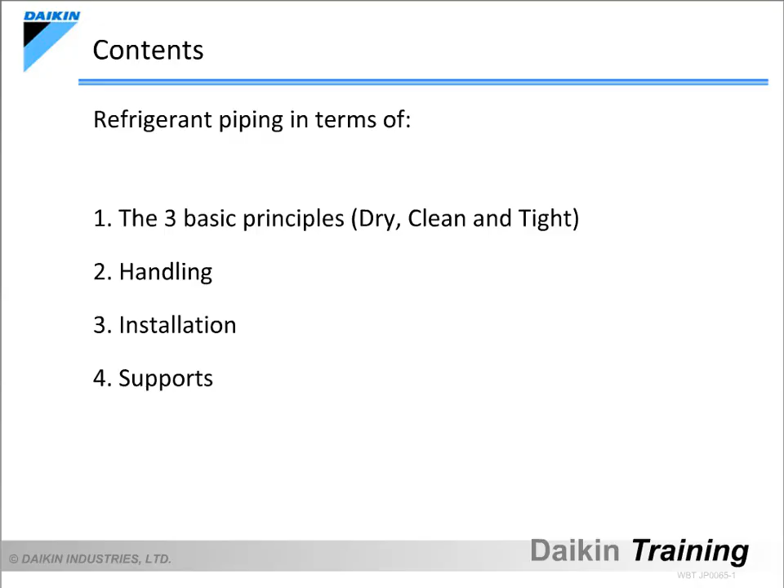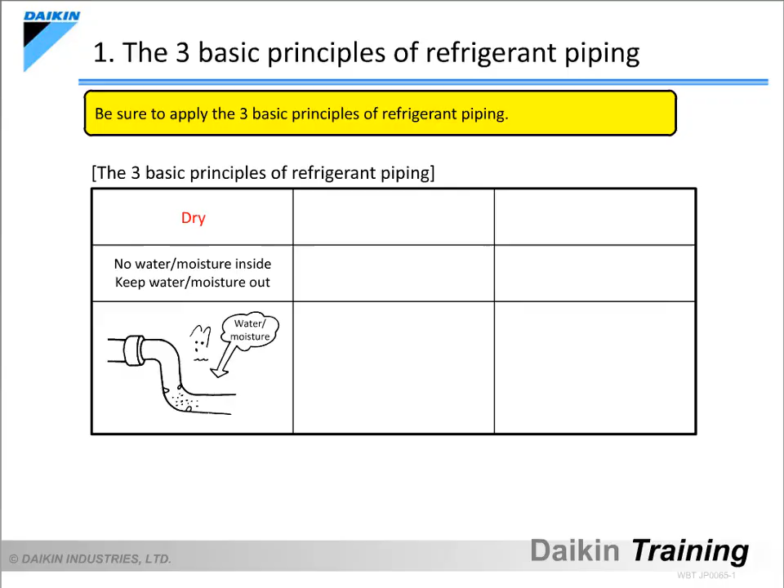When installing refrigerant piping, be sure to always apply the following 3 principles. The first is dry: water and moisture must be kept out. The second is clean: dust and contaminants must be kept out. The third is tight.

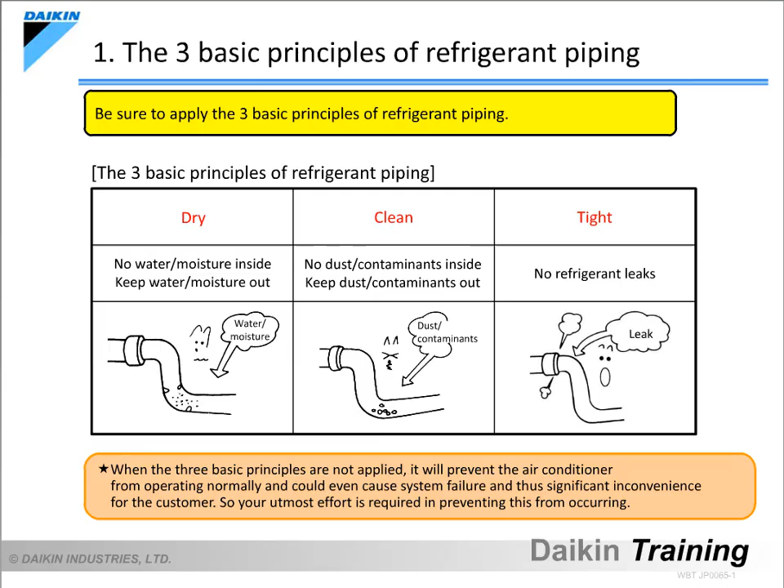Refrigerant must not leak. When the 3 basic principles are not applied, it will prevent the air conditioner from operating normally and could even cause system failure, causing significant inconvenience for the customer. So your utmost effort is required in preventing this from occurring.

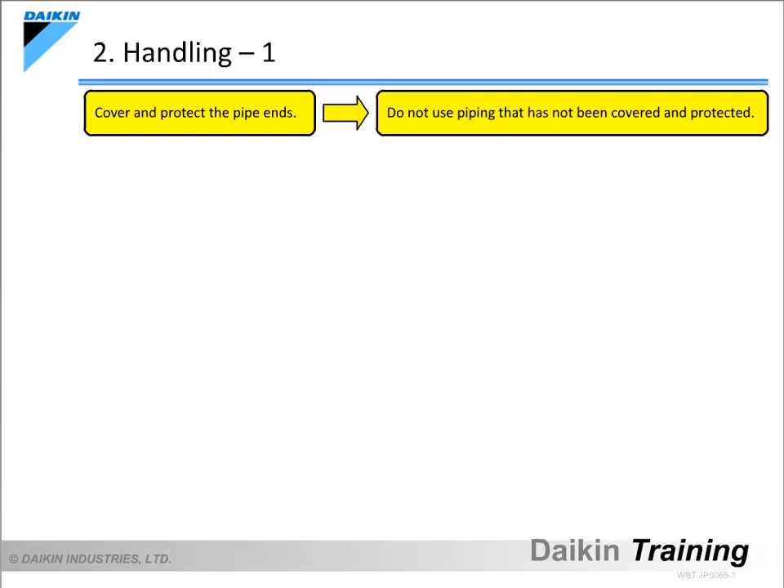In order to properly install piping, appropriate handling of the refrigerant piping is necessary, in addition to the installation work itself. In other words, the refrigerant piping must be handled so that no water, moisture or dust can get inside. That is why it is important to cover and protect the pipe ends when storing refrigerant piping.

Never place refrigerant piping directly on the floor. Always place it on a table or the like. If placed directly on the floor, water, moisture and dust could easily get inside the pipes. Particularly when pushing piping through a wall, be sure to securely cover and protect the pipe ends.

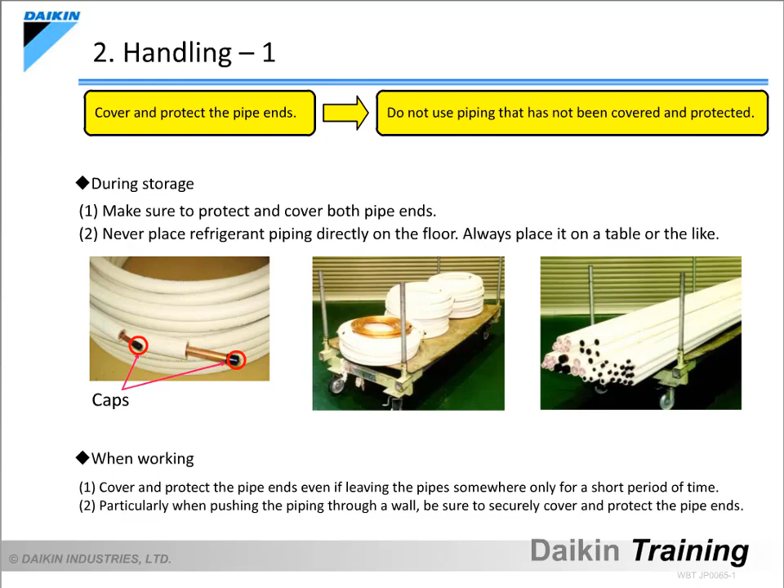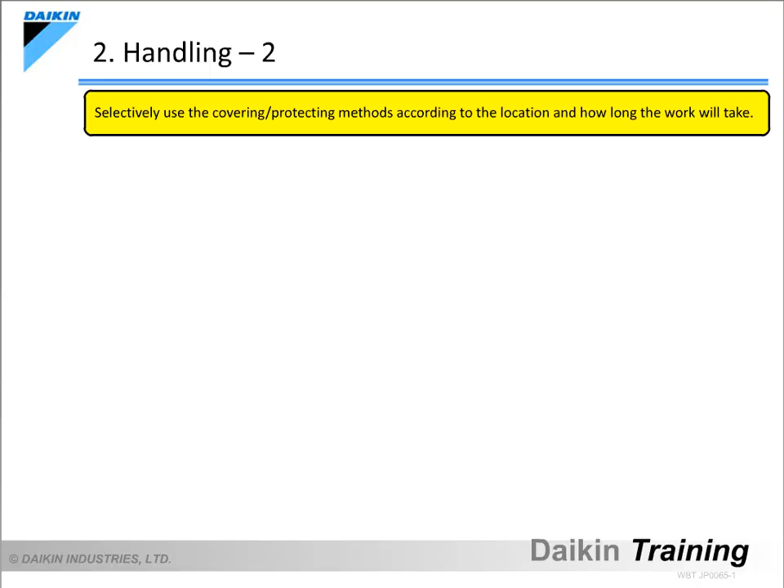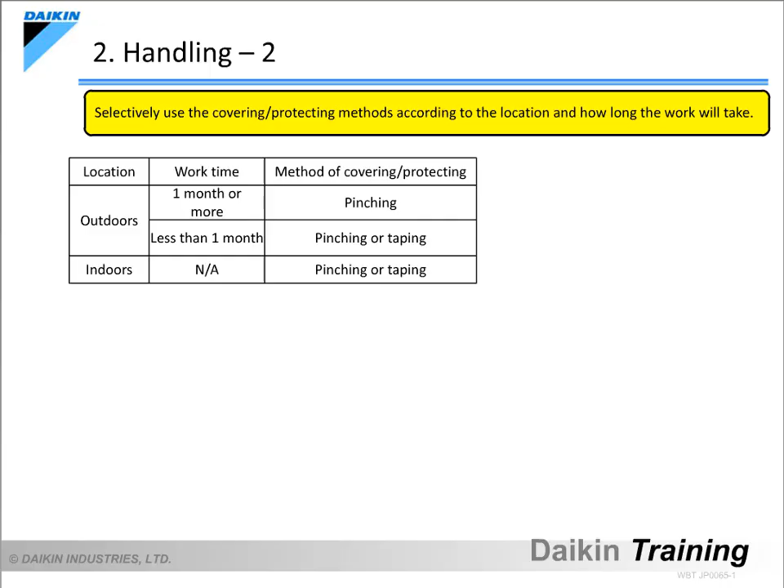The following covering and protecting methods are to be selectively used according to where the refrigerant piping will be installed and how long the work will take. When it is an outdoor location and the work will take at least 1 month to complete, use the pinching method. When the work will take less than 1 month, use either the pinching or taping method. When it is an indoor location, use either the pinching or taping method.

With pinching, the refrigerant piping is closed off, and the gap on the end is brazed. With taping, the end of the refrigerant piping is covered with vinyl tape.

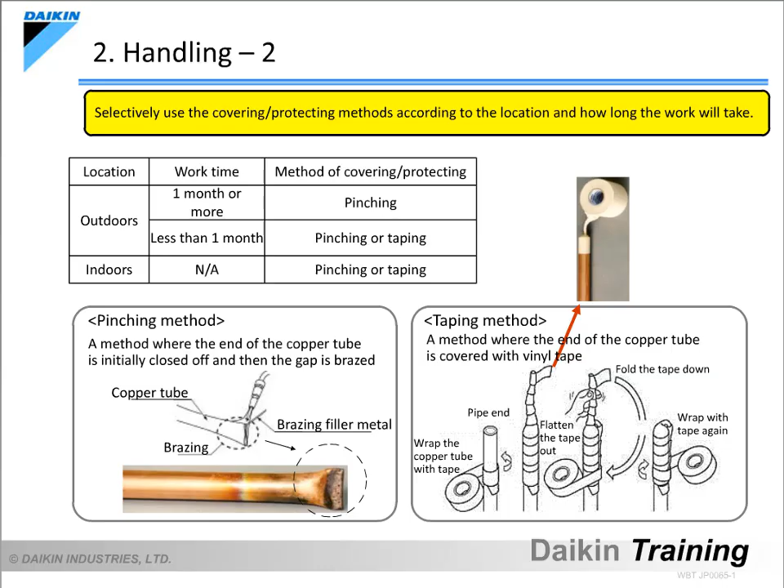The following should be adhered to when installing refrigerant branch piping. Be sure to always install the REFNET header or horizontal piping from the REFNET joint so it is level. If these are not installed level, it will cause refrigerant drift, which will result in strange noises and prevent normal operation. In terms of vertical piping from the REFNET joint, be sure to always install it vertically.

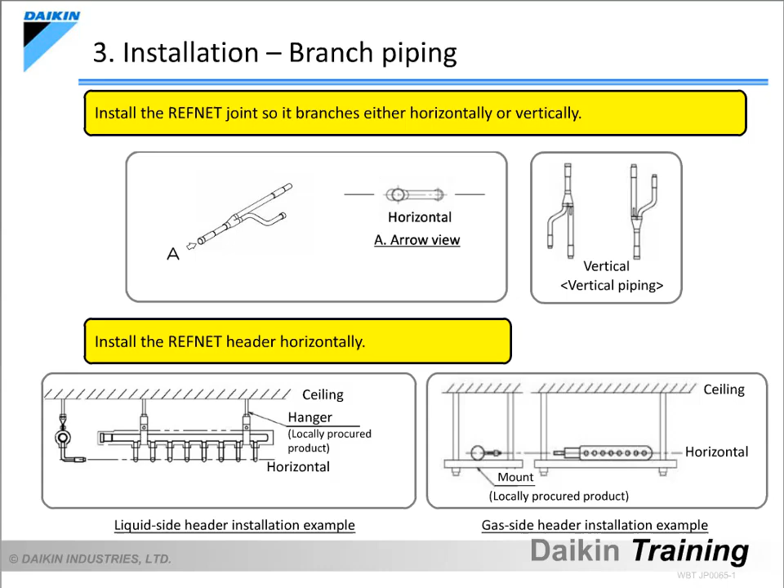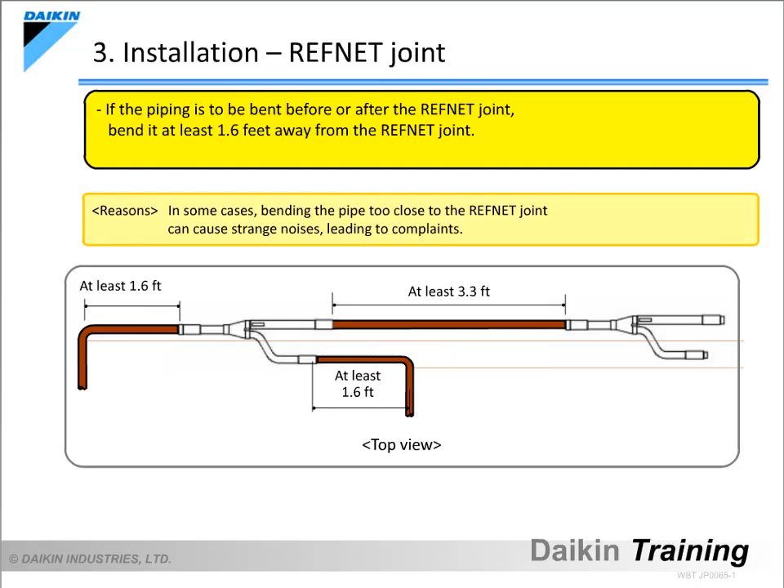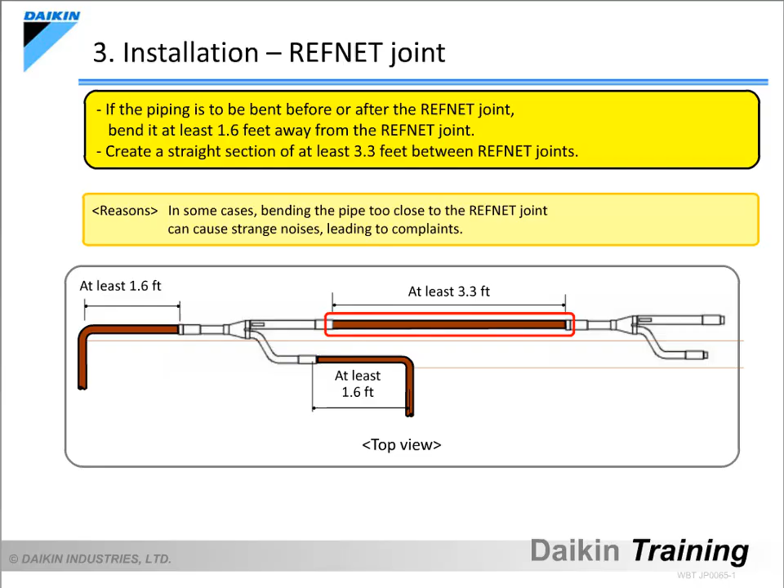If the piping is to be bent before or after the REFNET joint, bend it at least 1.6 feet away from the REFNET joint. This is because bending the pipe too close to the REFNET joint can result in strange refrigerant noises due to turbulent flow, leading to customer complaints. Moreover, it is necessary to create a straight section of at least 3.3 feet between REFNET joints.

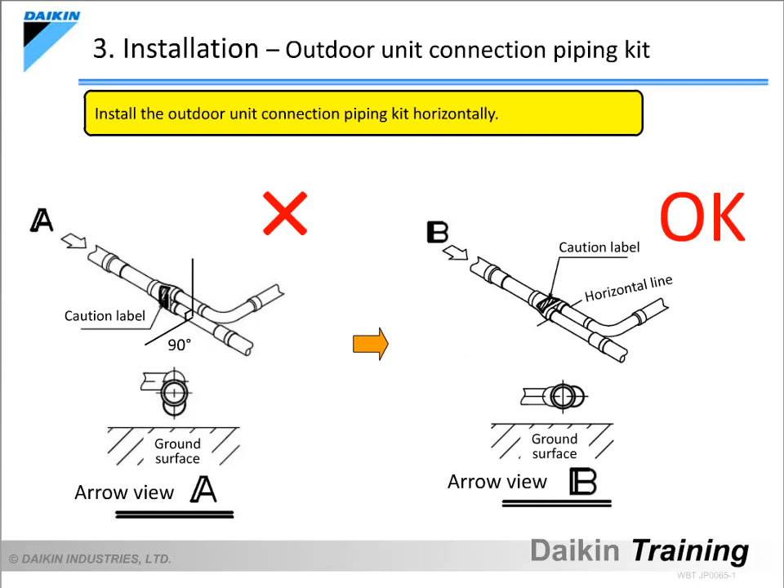Be sure to install the outdoor unit connection piping kit horizontally. If this is not done, it can cause refrigerant drift and prevent normal operation. In order to prevent refrigerant drift, create a straight section of at least 20 inches before the first branch.

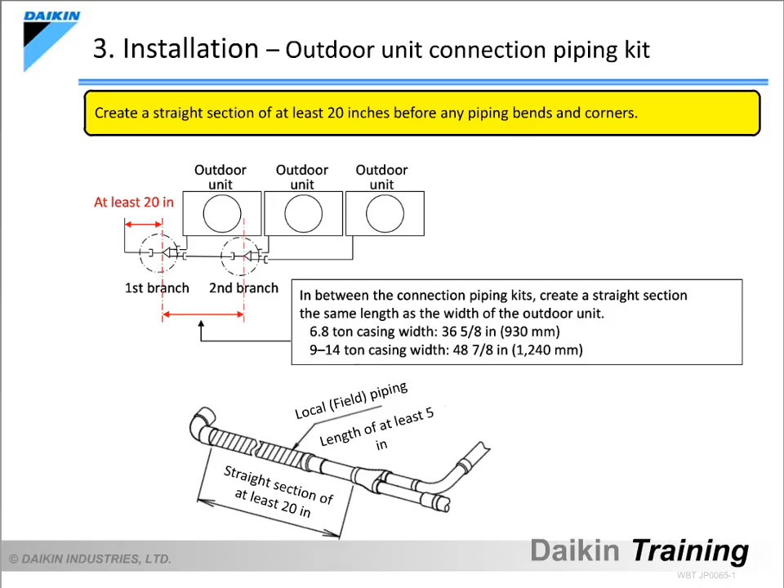Install refrigerant piping so that refrigerant oil does not build up inside. To do this, install refrigerant piping horizontally, or with an upward gradient toward the outdoor unit. If oil builds up inside the piping, it will prevent oil from being distributed evenly in the system.

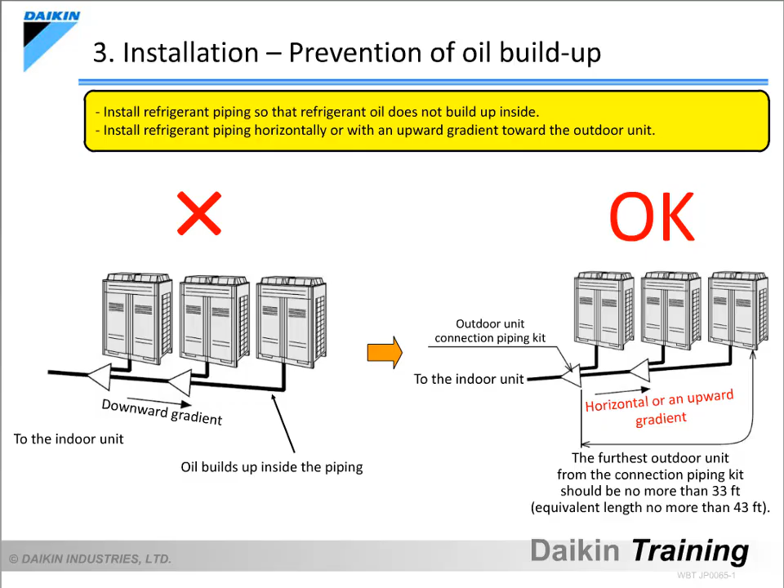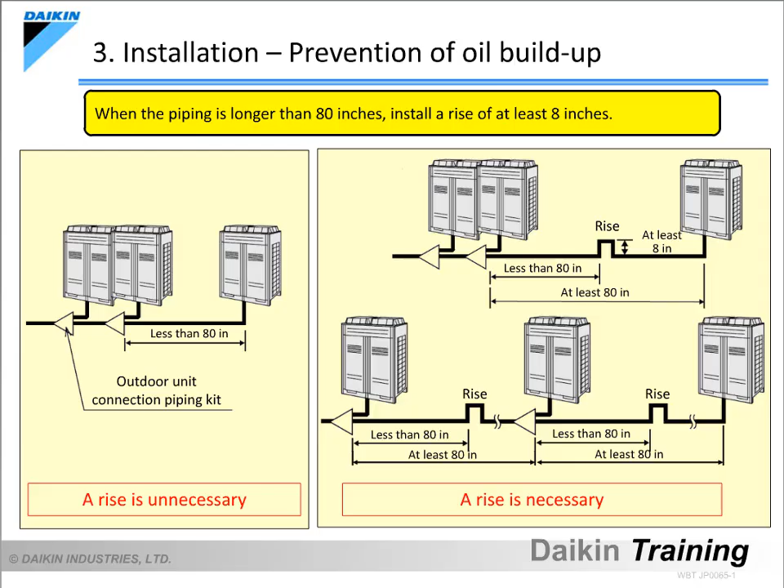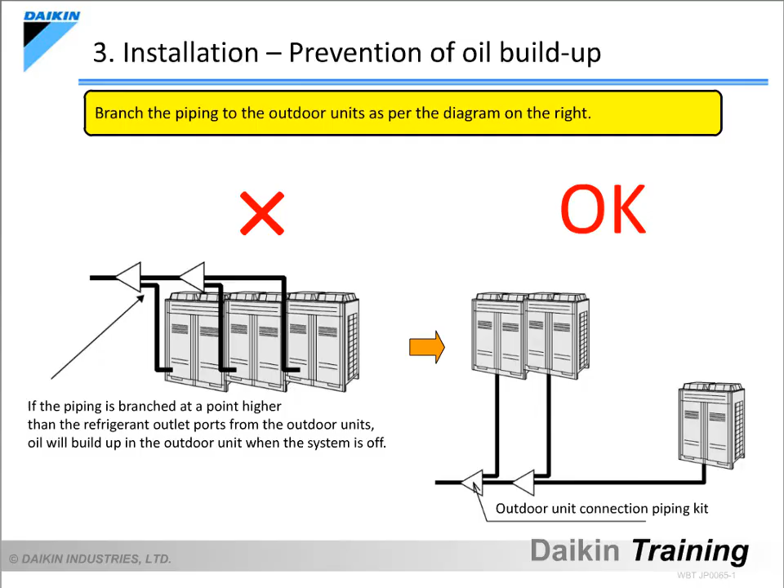When an outdoor unit must be installed in a lower position for some reason, install a rise of at least 8 inches before the piping goes downward to prevent oil buildup in the outdoor unit.

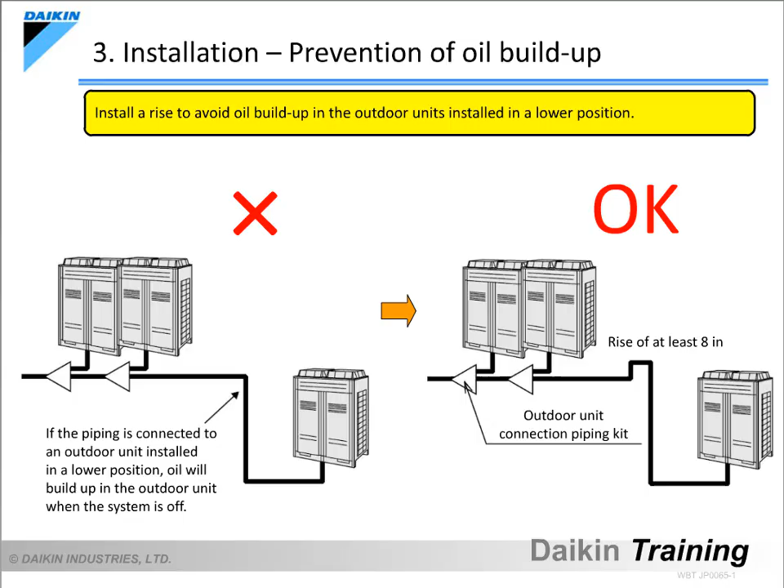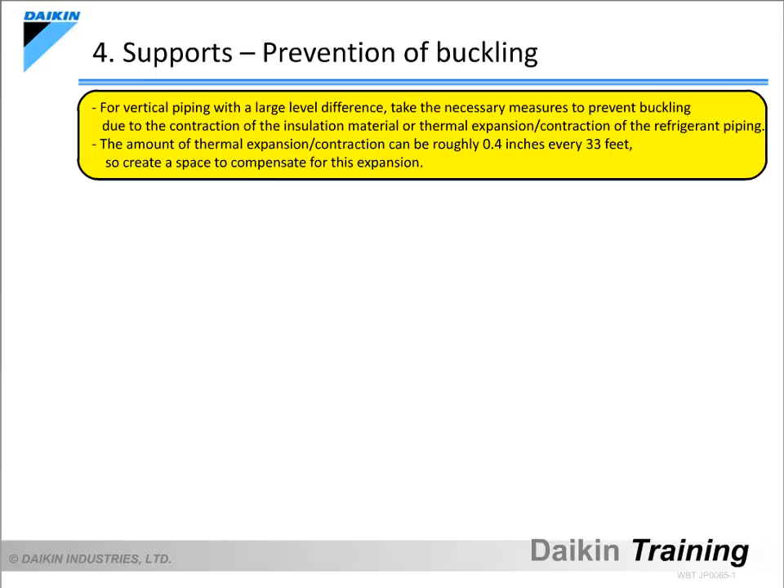For vertical piping with a large level difference, take the necessary measures to prevent buckling. Also, create a space to compensate for changes in the size of the piping due to thermal expansion.

The insulation material will shrink over time, and if the piping is supported from above the insulation material, the piping supports will loosen and the piping itself will slip further downward as the level difference increases in the VRV refrigerant piping. Moreover, the repeated expansion and contraction of the refrigerant piping, due to temperature differences, will lead to the load on the vertical piping being concentrated at the very bottom, eventually causing buckling.

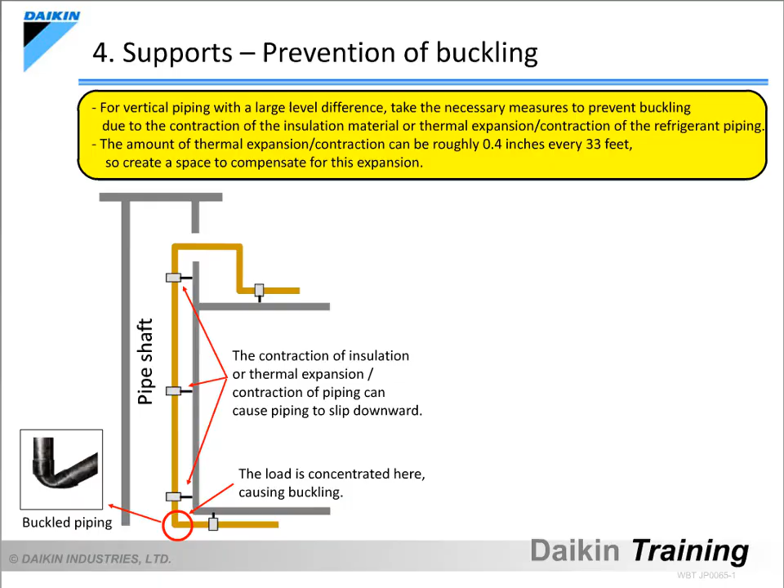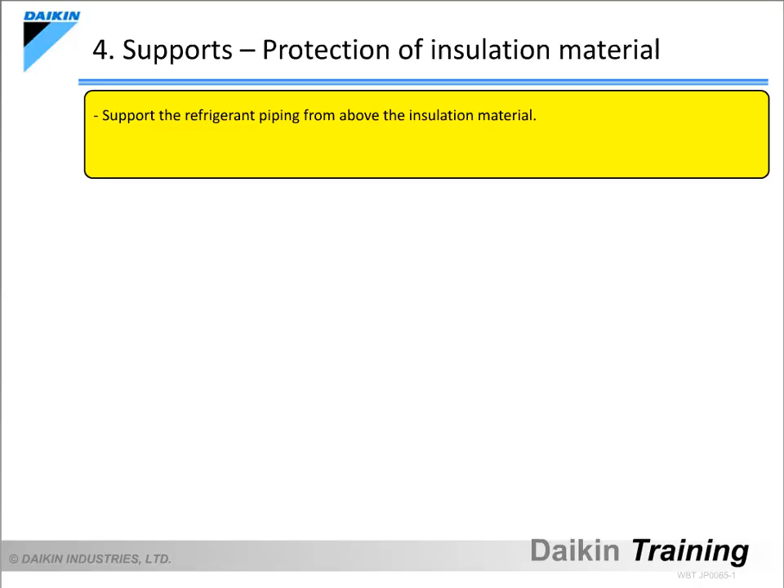The temperature of refrigerant piping can be quite low, so support it from above the insulation material to prevent condensation. When doing so, be sure to prevent the insulation material from being crushed by the weight of the piping. If the insulation material gets crushed, it will decrease the effectiveness of the insulation, causing water to leak.

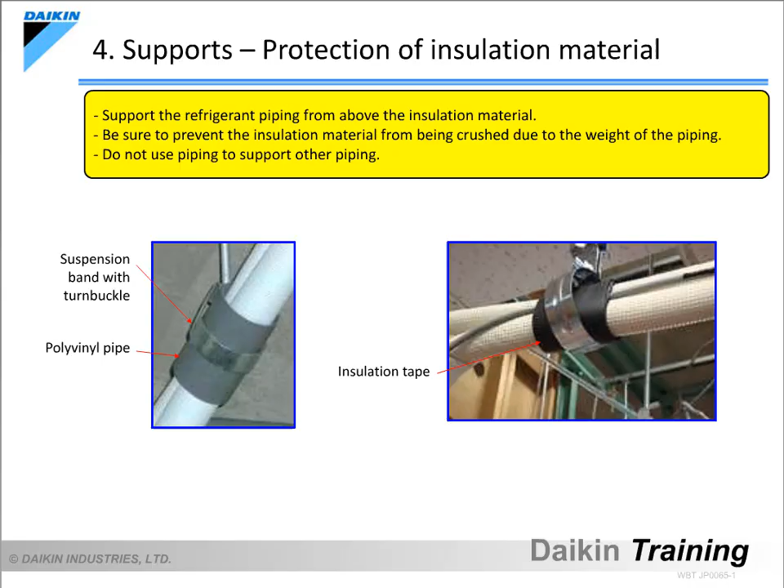Do not use piping to support other piping. If this is done, the piping will place further load on the support part.

In order to prevent sagging or vibrating of the piping due to its own weight, the support intervals for the horizontal pipe should be within 5 feet if its outer diameter is up to 3/8 of an inch. If the outer diameter is half an inch or more, the support intervals should be within 6.6 feet.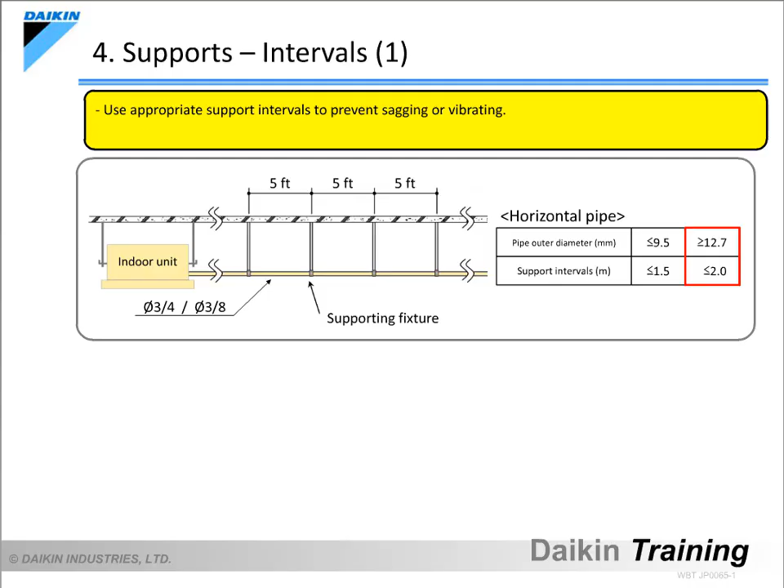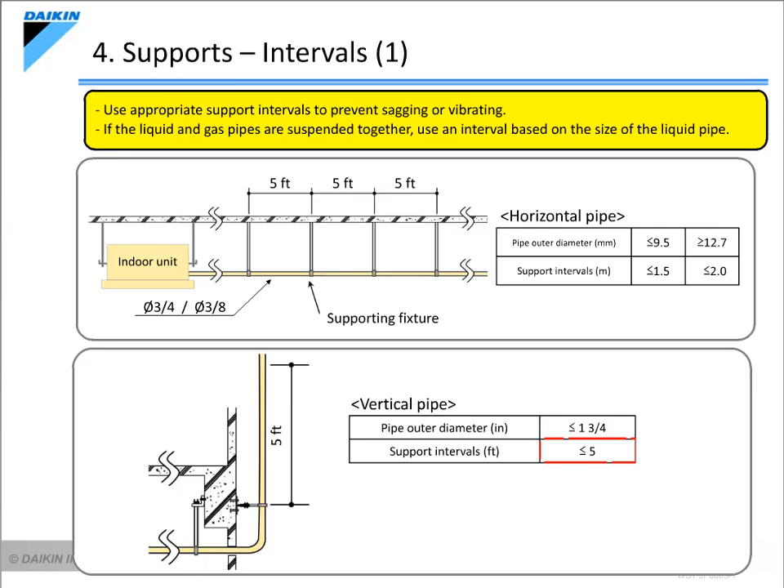If the liquid and gas pipes are suspended together, the support intervals should be based on the size of the liquid pipe. Moreover, the support intervals for the vertical pipe should be within 5 feet.

Support the refnet joint at 3 points to maintain levelness. Place the supports between 1 and 1.6 feet from the center of the refnet joint.

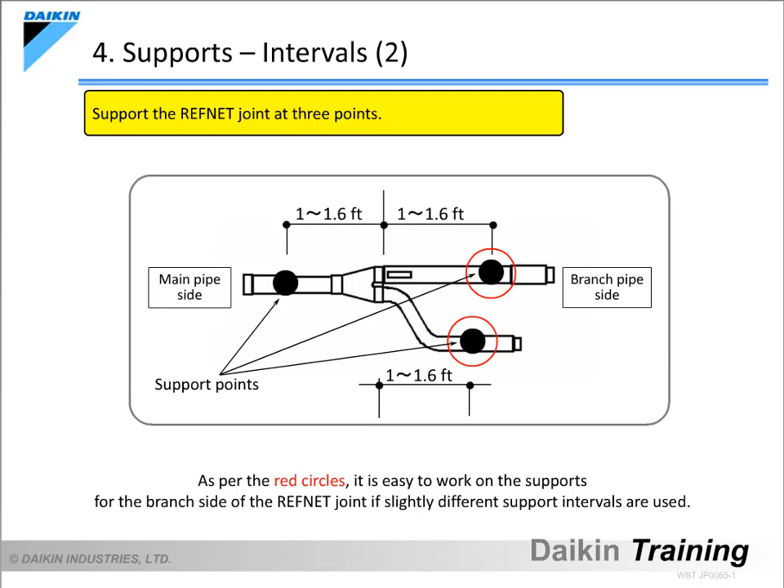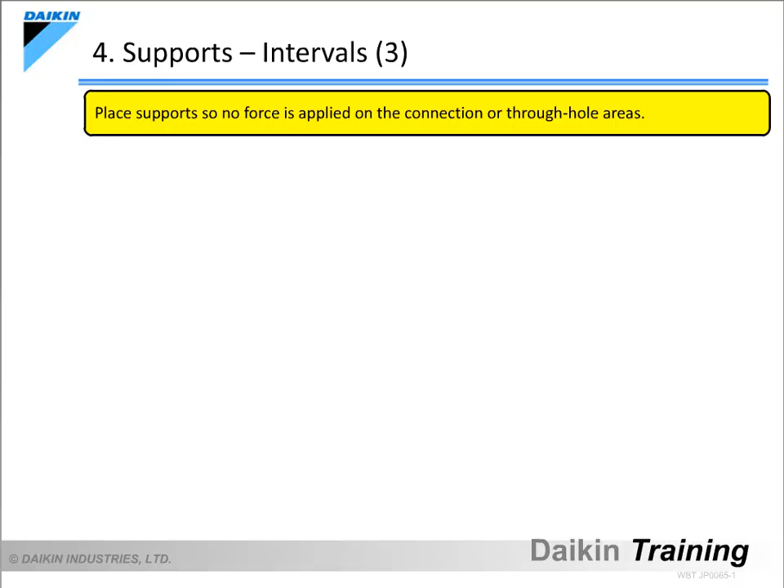Place supports for the refrigerant piping so that there is no direct load on the connection area with the indoor unit or the through-hole area on the external wall. Around the indoor unit, for example, install a support at least within 1 to 1.6 feet from a flare connection to minimize the load on the connection.

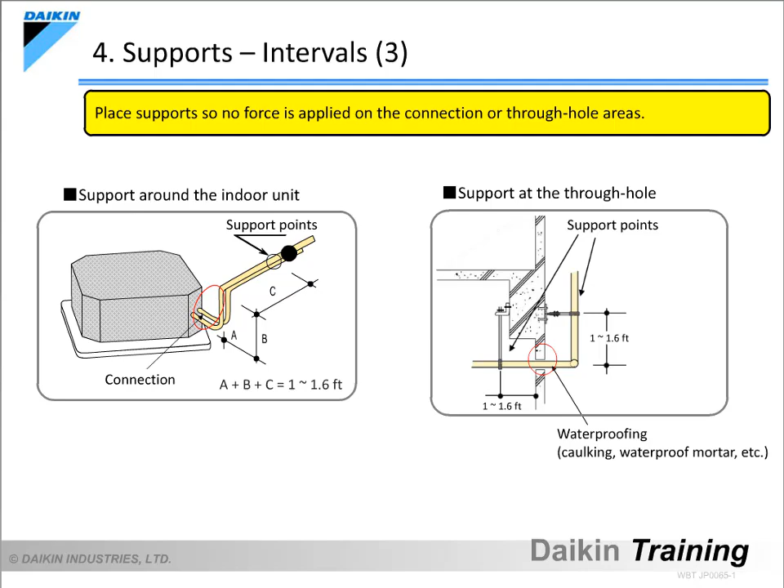Also, install a support within 1 to 1.6 feet up, down, left, or right from the through-hole to prevent the waterproofing, such as caulking, from being separated from the through-hole or piping due to contractions and vibrations of the refrigerant piping. Let's now learn about the insulation work.

As there are no tests to confirm insulation work, sealing the seams of the insulation material and the like should be done carefully. Install the insulation so that there are no gaps between the insulation material and the piping.

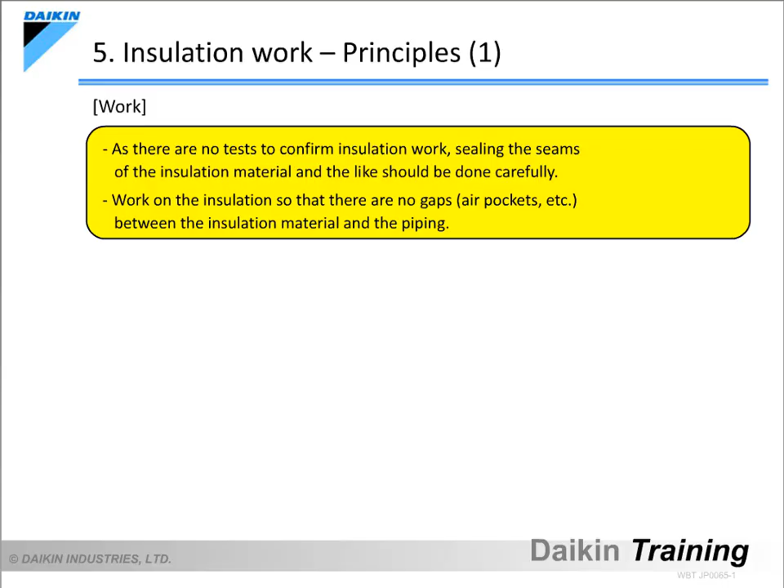Use insulation material that can sufficiently withstand the temperature of the refrigerant piping and complies with local regulations regarding fire prevention and the like.

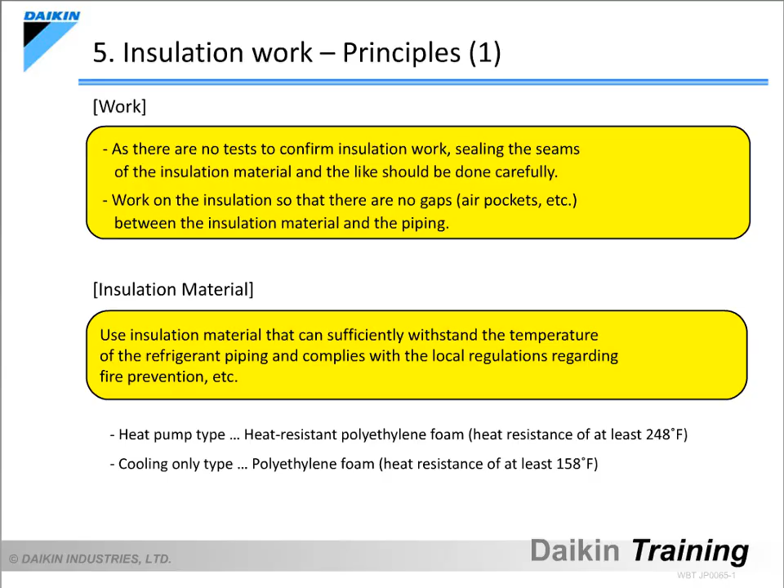For the heat pump type, use heat-resistant polyethylene foam that can withstand heat of at least 248 degrees Fahrenheit. For the cooling-only type, use polyethylene foam that can withstand heat of at least 158 degrees Fahrenheit.

Conduct the insulation work on all the connections after the system passes the airtightness test. In order to prevent condensation, if the temperature and relative humidity around the refrigerant piping may exceed 86 degrees Fahrenheit and 80% respectively, the insulation must be at least 13/16 of an inch thick.

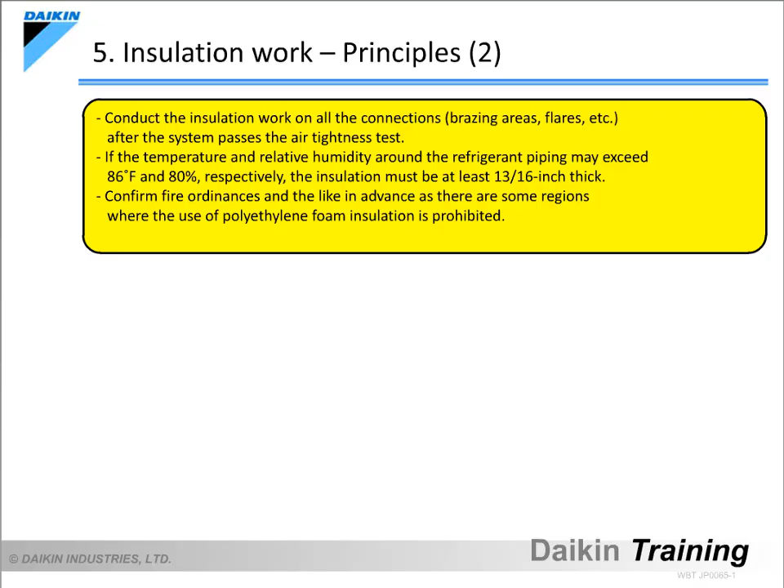There are some regions where fire ordinances and the like prohibit the use of polyethylene foam insulation. Therefore, confirm those regulations prior to doing the insulation work.

Insulate the gas and liquid piping separately. In consideration of how the insulation material will contract over time, apply a special adhesive to the cut surfaces of the insulation material and seal them with insulation tape.

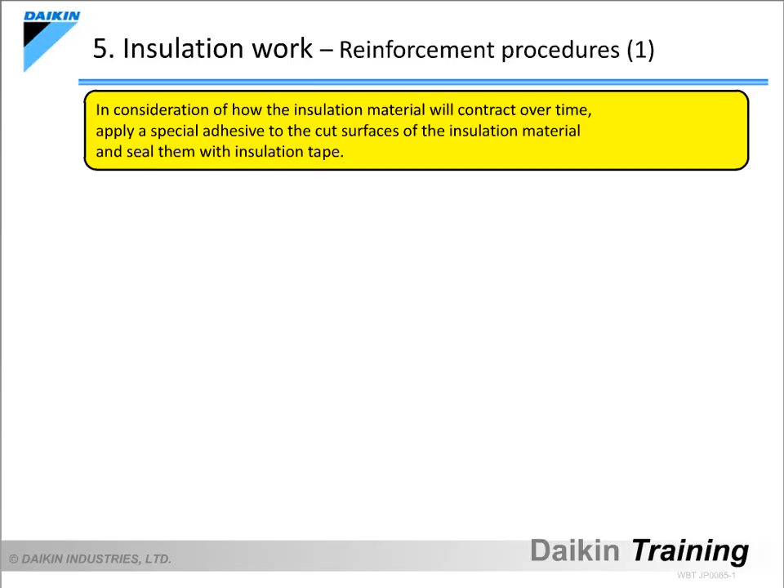Specifically, first apply the special adhesive to stick the pieces of insulation material together. After this, wrap wide adhesive tape around the areas that have been cut.

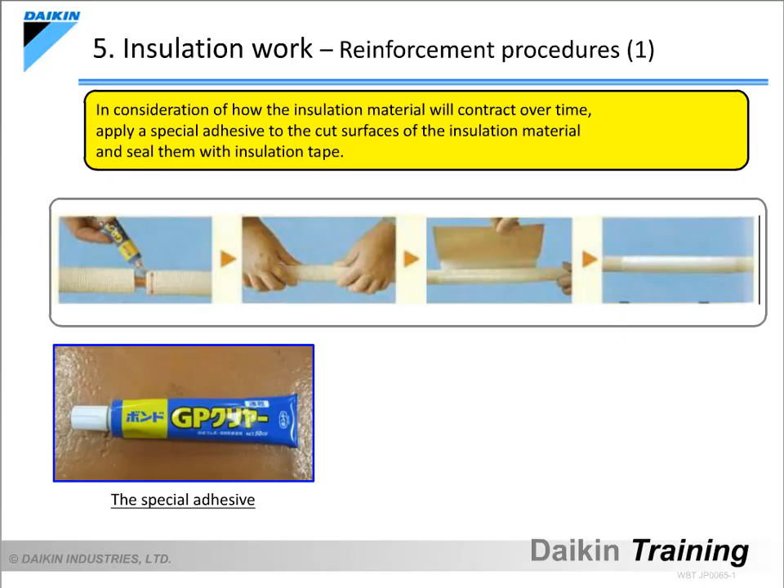When inserting insulation material to fill a gap between the insulation materials, cut the material so that it is 8 inches longer than the gap. The insulation material will contract over time, and this is done to prevent the gaps from reopening.

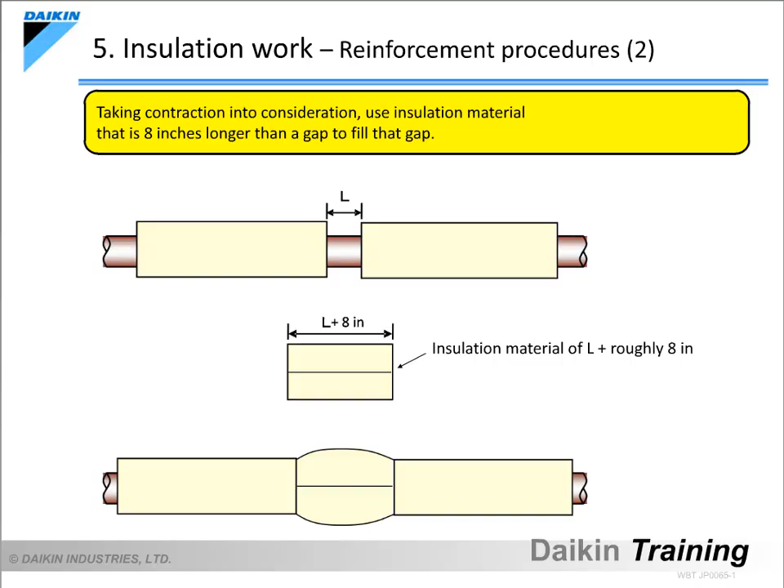Try to minimize the number of cuts in the insulation material. For example, when reinforcing the insulation material near a bend, stretch the insulation material up this way. This allows it to be reinforced in just one place and saves time and effort.

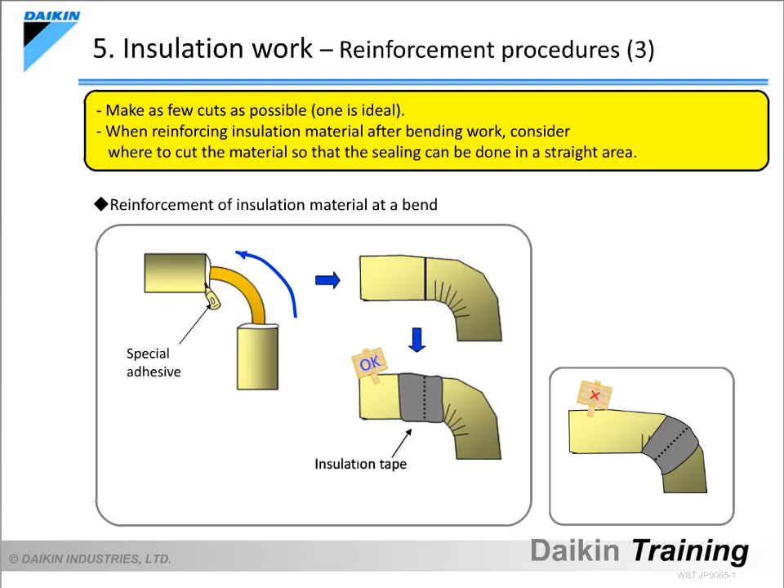If the insulation is sealed at a bend, it may become deformed and cause the insulation to be insufficient. Therefore, be sure to reinforce the insulation in a straight area.

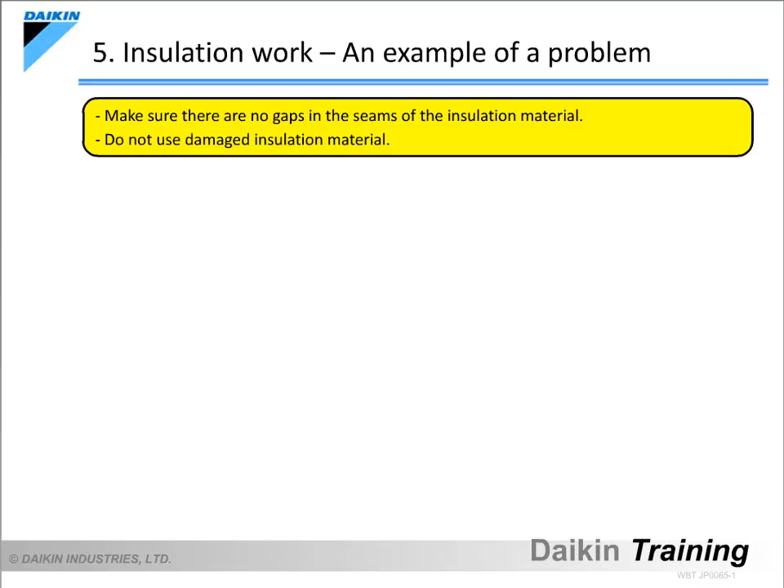If the insulation material is torn by hand, where it was torn will be uneven and lead to gaps in the seam. When cutting the insulation material, use a sharp utility knife so it can be cut straight, before sticking an adhesive on the surface.